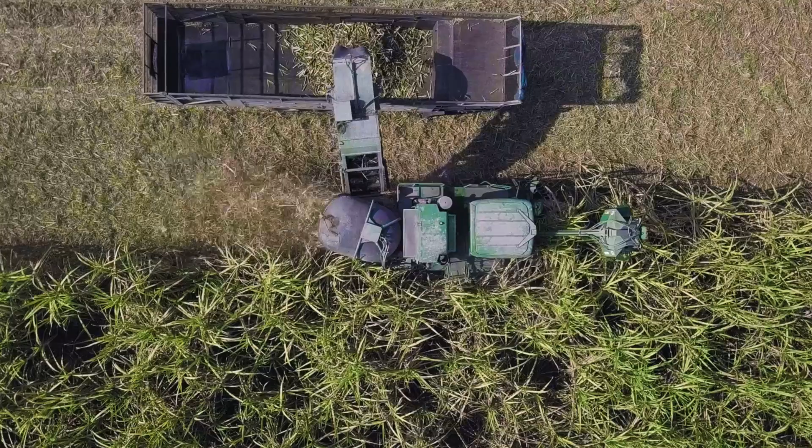It may not have been an easy year for many of us, but we are glad to have made promising developments despite the circumstances. Here's a recap on how the past year panned out for us in the sugar industry.

We recently launched our very own training facility in Ambernath with a team of 30 specialized technicians with decades worth of experience. We now conduct courses for training welders for specialized jobs.

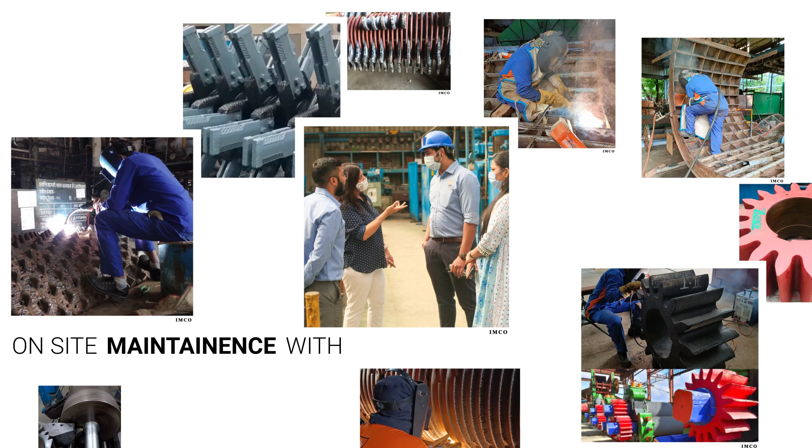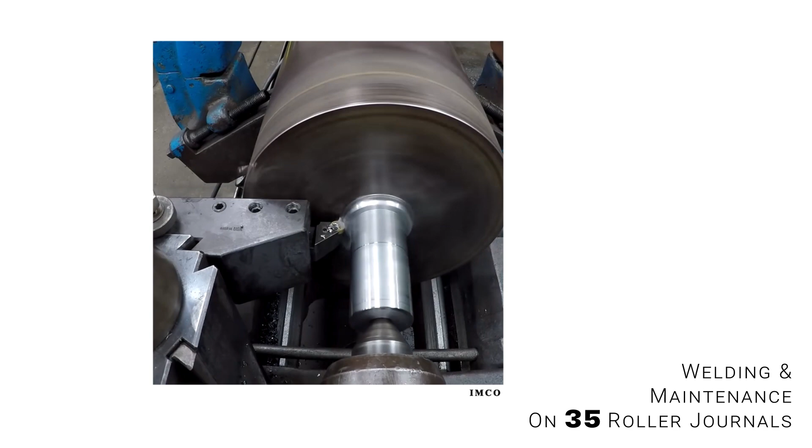We accomplished 800 plus jobs around the country across more than 40 sites. Our team of specialists provided on-site maintenance with excellent workmanship, including arcing on 350 plus rollers, wear protection on 65 TRPF rollers, welding and maintenance on 35 roller journals, reconditioned over 180 pinions, repaired over 22 anvil plates, modified 8 existing levelers.

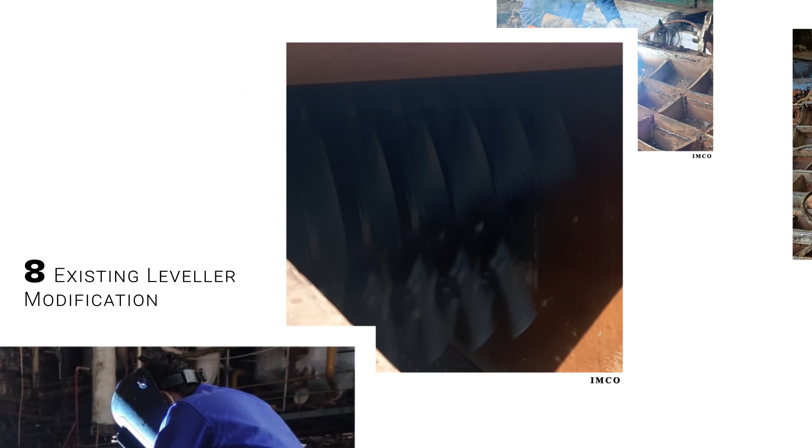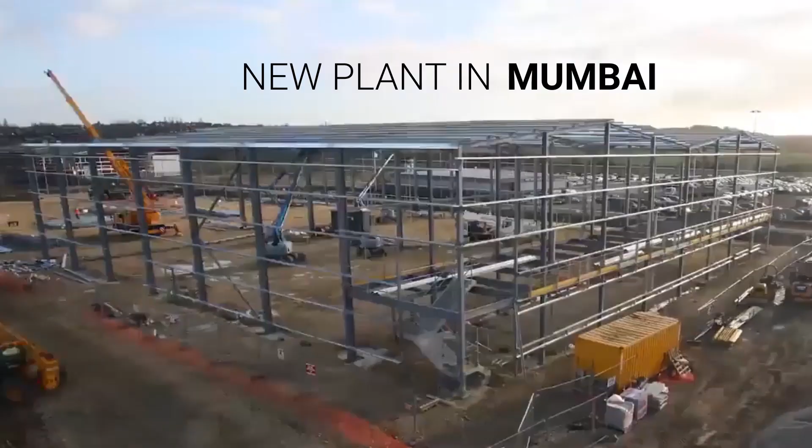By acquiring businesses in 3 more countries this year, we are now present in 45 countries around the world. We have expanded our production power by signing off on our brand new plant in Mumbai. The factory is sprawled across 6 acres and is an absolute powerhouse.

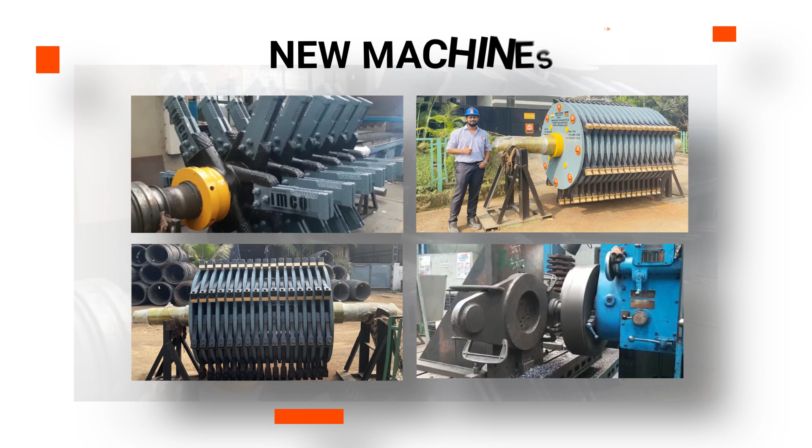We've successfully manufactured and commissioned 15 levelers and 6 fiberizers to further benefit our clients. We launched the IMCO Mac 1250, a versatile multi-purpose welding machine.

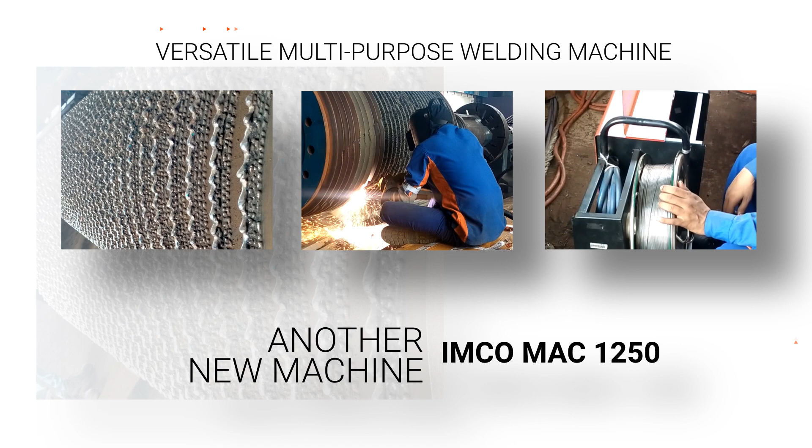In addition to our new devices, we also launched our own line of specialized wires and electrodes for the sugar industry. We grew our family by a strength of more than 40 employees. We have also joined hands with promising new partners for a bright future ahead of us.

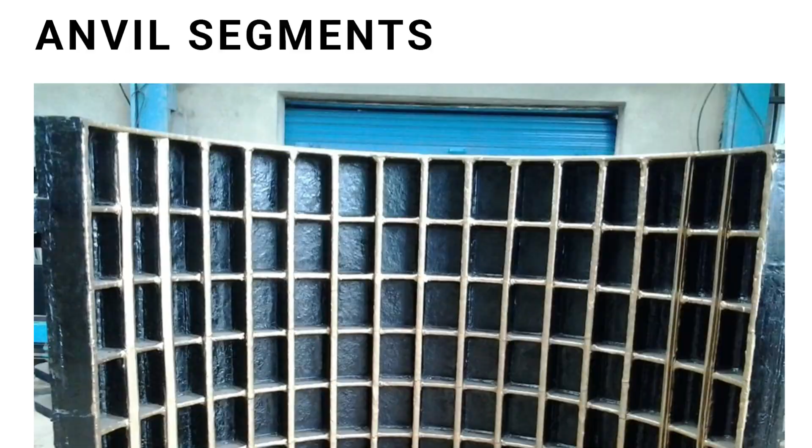With new additions to our arsenal, a new look was bound to be revealed. Our latest website is clean and concise, showcasing all our offerings under one domain.

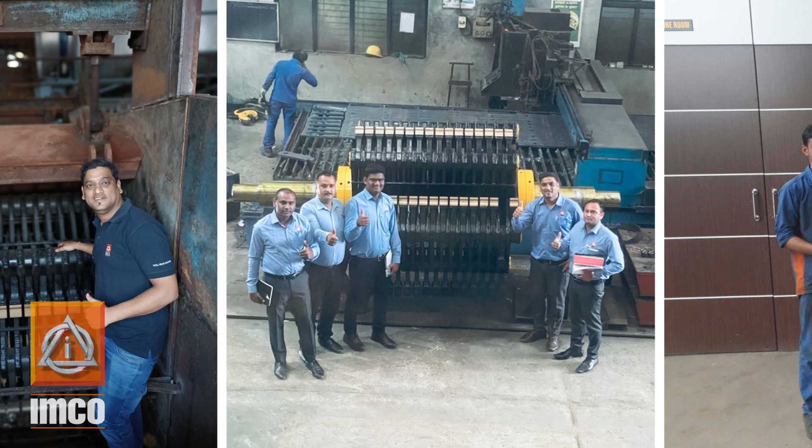All in all, it has been yet another spectacular year, from the latest technological innovations to strengthening ourselves with manpower. We continue to create solutions to minimize wear and tear problems for all our clients.